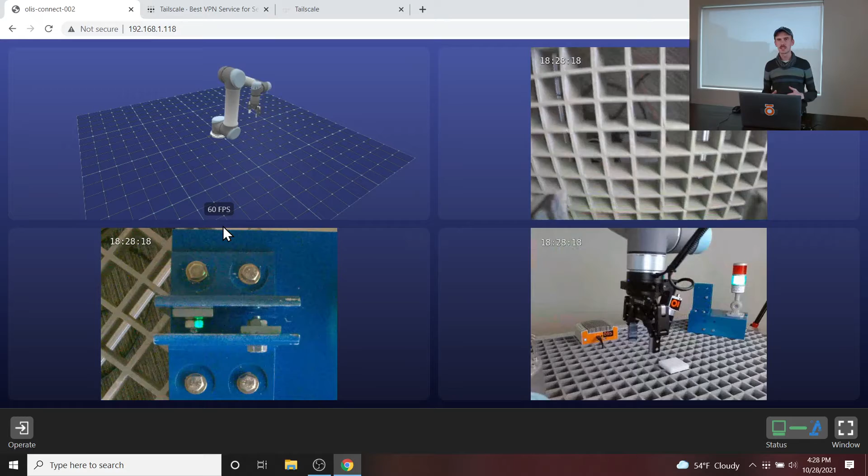First, you're going to need the IP address of your Olis Connect, and that's available on the UR pendant on the Olis Teleop UR cap. So I've entered that IP address in my browser, and now I'm able to monitor my robot.

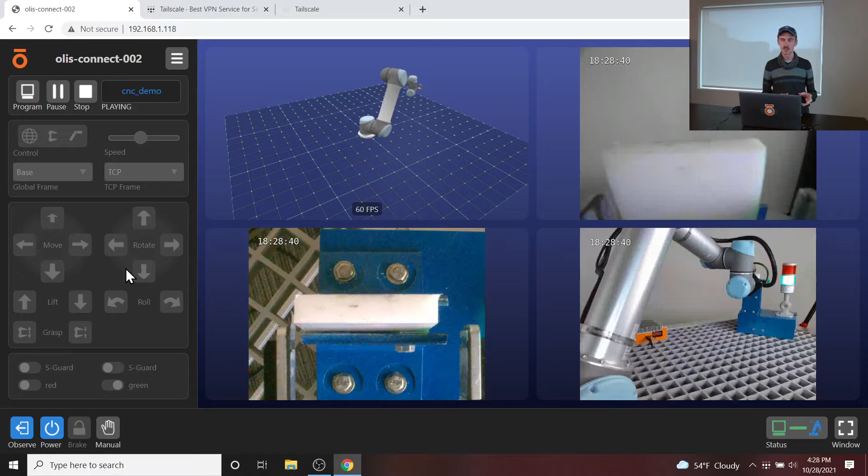Then I can click Operate, and this is where I can run programs or control the robot manually using teleoperation. But in this case, I'm going to show you how to add your Olis Connect in your robot to

a VPN such that you can access it from anywhere. So we're using a VPN solution called Tailscale. So you'll have to download it on your device, and I've already done that on this machine.

And you can see in the Tailscale portal, my Windows machine is already on the VPN, and so is my phone. And so now it's time to add the Olis Connect.

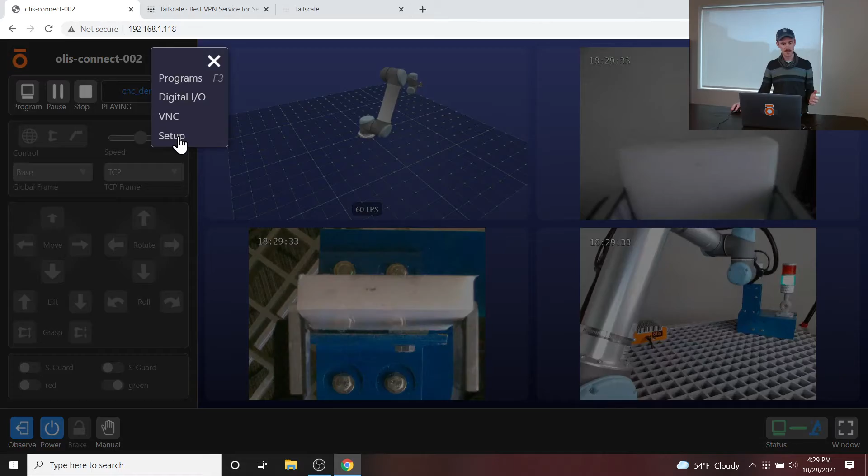So I'm going to go to Settings, Auth Keys, and generate a one-off key. I can then copy this, and I go back to the Olis Connect. I go to the hamburger menu and Setup, and I paste in the auth key here and hit Connect.

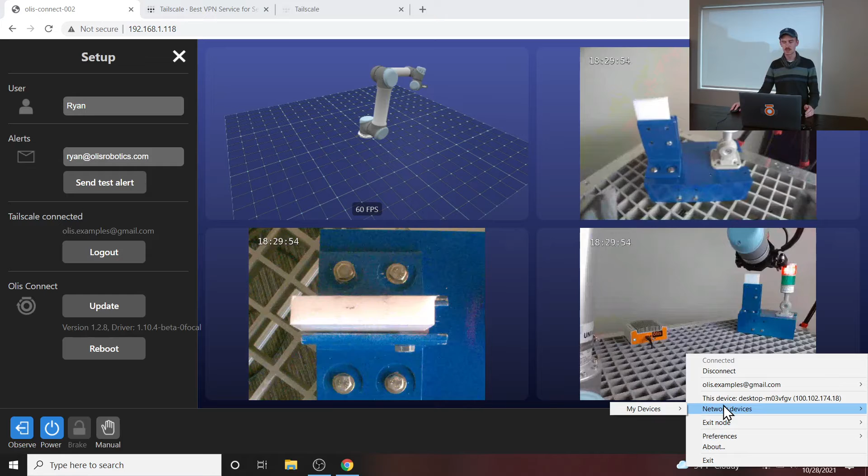Alright, so now the Olis Connect is connected to the Tailscale VPN. And on my Windows machine, I can go to the System tray and right-click on Tailscale, go to Network Devices, My Devices, and click on Olis Connect 002.

That copies the new IP address to my clipboard. I can then paste that into Google Chrome. And using this IP address, I can access the robot from anywhere.

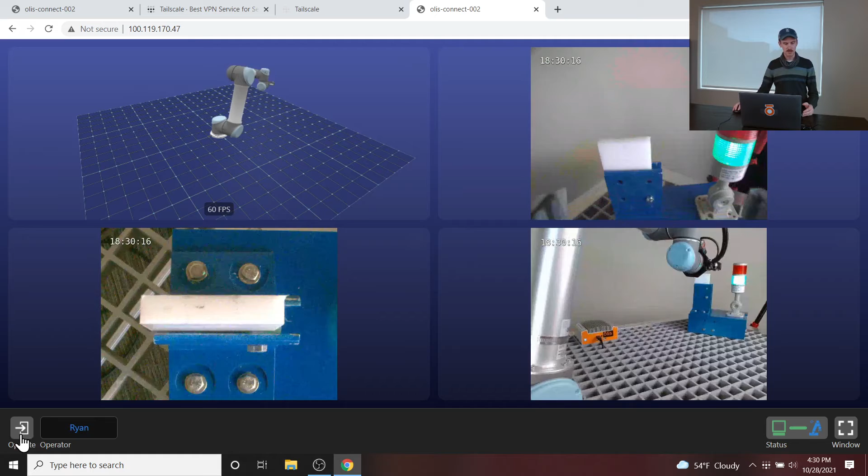So I'll take control again from here. And so now I can run programs, do teleoperation from any network. But let's say I want to give someone else access to the robot to help me solve a tricky problem.

I'm going to go back to the Tailscale portal, back to Machines, and then on the Olis Connect row, I'm going to go to the Options, and I'm going to say Share this machine. I can now create a link, and I can send this to someone to give them access to this Olis Connect.

And then down here, I can see the different users that have access to this Olis Connect, and I can revoke them or send them a link again.

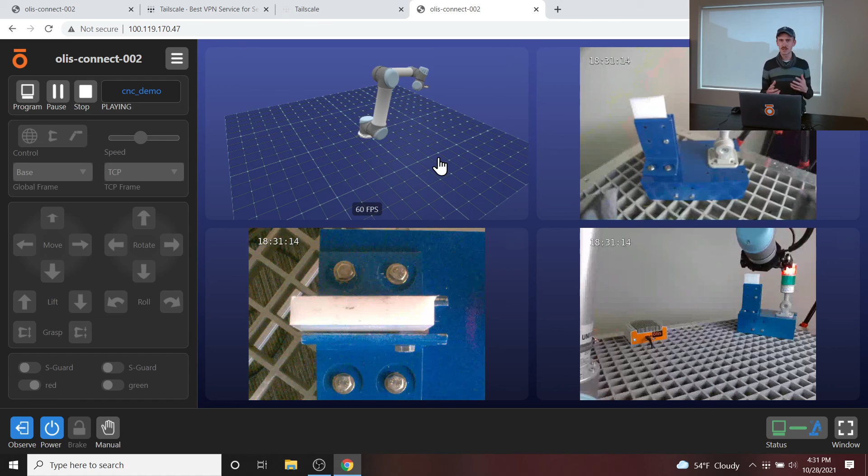So that's how you get your Olis Connect on a VPN such that you can access it remotely and let other people access it. And that's going to help you keep your robot working more.